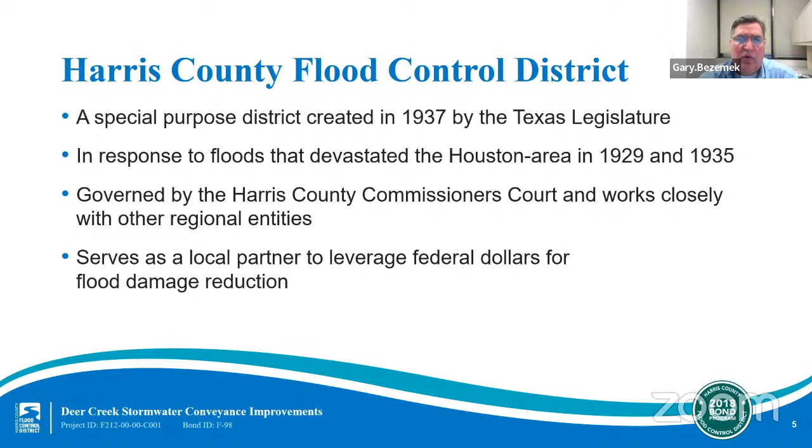The organization was created in part to serve as a local partner to leverage federal funding for flood damage reduction projects. Our mission has expanded since our founding, leading to billions of dollars in federal, state, and locally funded infrastructure improvements in the ground.

The mission of the Harris County Flood Control District is to provide flood damage reduction projects that work with appropriate regard for community and natural values. One of the most difficult challenges we face is constructing effective projects that are sensitive to community and natural values in a highly urbanized area.

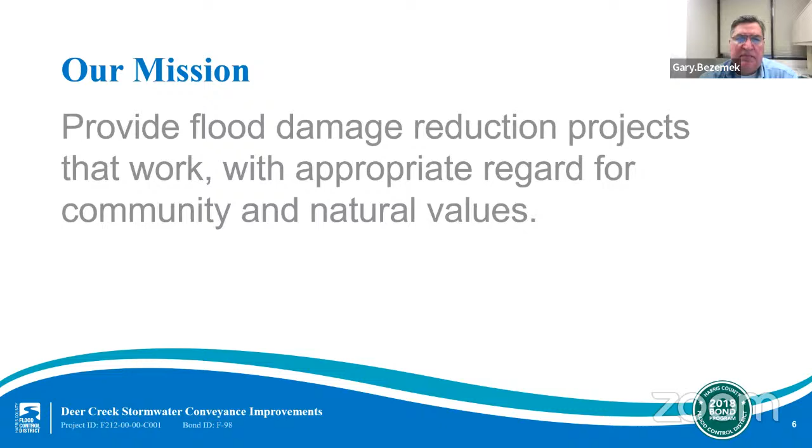Harris County includes 23 main watersheds, totaling approximately 1,800 square miles and more than 2,500 linear miles of channel. 2,500 miles is approximately the distance from New York to California. A watershed is a geographical region of land that drains to a common channel or outlet. Each watershed has its own unique characteristics and needs. The project we are presenting tonight is in the Galveston Bay Watershed, which is located in southeast Harris County.

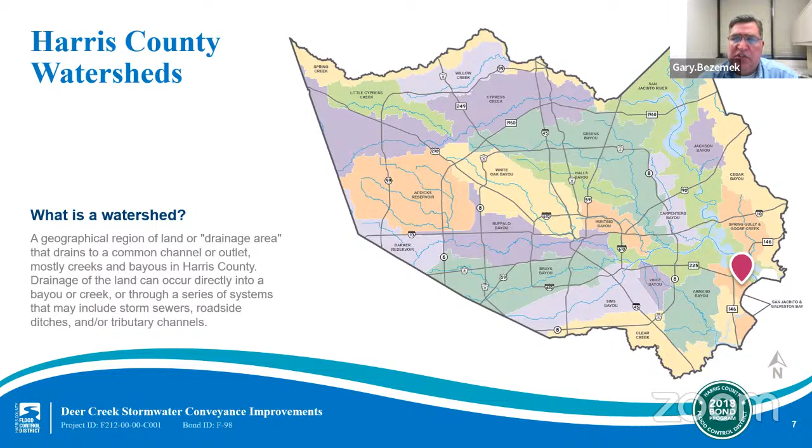Our area is flood prone. Here are some of the reasons why. Our area experiences extreme rainfall, including tropical storms and hurricanes. Our area is characterized by flat, slow draining land, and our area soils are clay soils that do not soak up excess rainfall quickly.

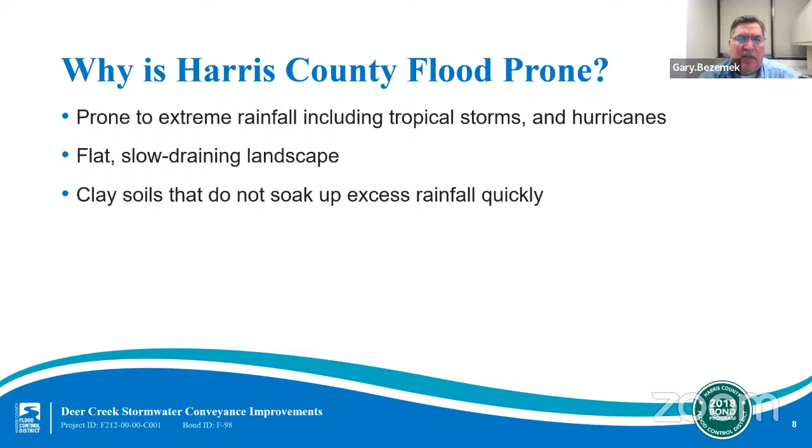While the Flood Control District plays a critical role in flood risk reduction, we are one of several entities involved in these efforts in our region. When rain falls on your roof, it flows through several jurisdictions, such as streets and drains, managed by the Harris County Engineering Department, a municipal utility district, or a city, such as the City of Houston, before it flows into a larger channel, creek, or bayou that the Flood Control District owns and maintains. This slide illustrates the various jurisdictions, which sometimes we even share with other entities.

Inside neighborhoods, as shown on the left side of this illustration, storm sewers and roadside ditches collect stormwater runoff and start the process of moving it away from streets and homes. Storm sewers and roadside ditches are the responsibility of the underlying municipality and Harris County for unincorporated areas. The larger bayous and channels that take the collected stormwater and move it through our drainage system to Galveston Bay are the responsibility of the Flood Control District. This is shown on the right side of the illustration.

In the middle is a stormwater detention basin, sometimes constructed by the Flood Control District. When storm sewers on the left are increased, this creates an increase in runoff. Since it is our policy to avoid any adverse impacts from our projects, detention basins help to safely take in and temporarily store excess stormwater during heavy rain events. Often we partner with Harris County precincts, utility districts, and others to add recreational amenities such as trails to these basins and along our channels.

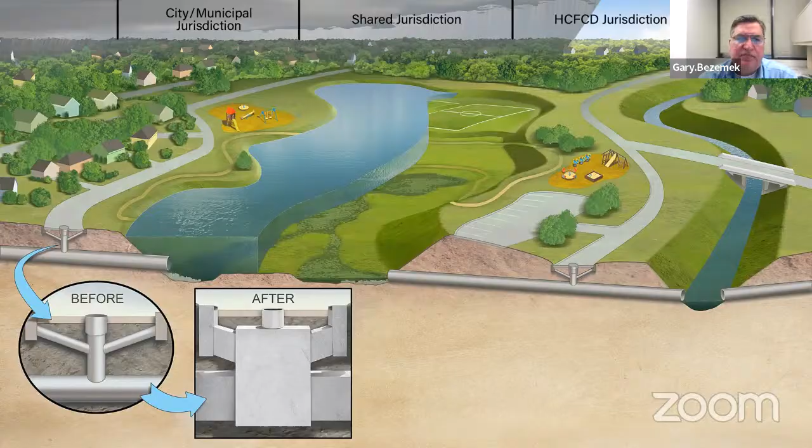On August 25th, 2018, Harris County voters approved $2.5 billion in bonds for flood risk reduction projects. This vote followed a series of meetings across Harris County in each watershed, which resulted in a list of what is now 181 bond projects. As of August 25th, 2021, every project included in the 2018 bond program has been initiated, including all 5 of the projects in the Galveston Bay Watershed.

A total of more than $1.35 billion in partnership funding has been secured so far to stretch the 2018 bond program even further. The actual timing of each individual project will depend on a variety of factors, including environmental permitting, right-of-way acquisition, if needed, and potential utility relocation, and in some cases, requirements of a particular grant. That said, project lists and projected schedules are updated regularly on our website.

While the bond was for $2.5 billion, the full cost of every project in the bond table is almost $5 billion. So we made it clear from the outset that we would need funding partners to fully construct the projects in the bond program. As I mentioned, we've had some success so far, having secured more than $1.35 billion in partner funds. And this graphic illustrates the many sources of those partnerships, including federal, state, and local funding that Flood Control District is working to secure for Harris County.

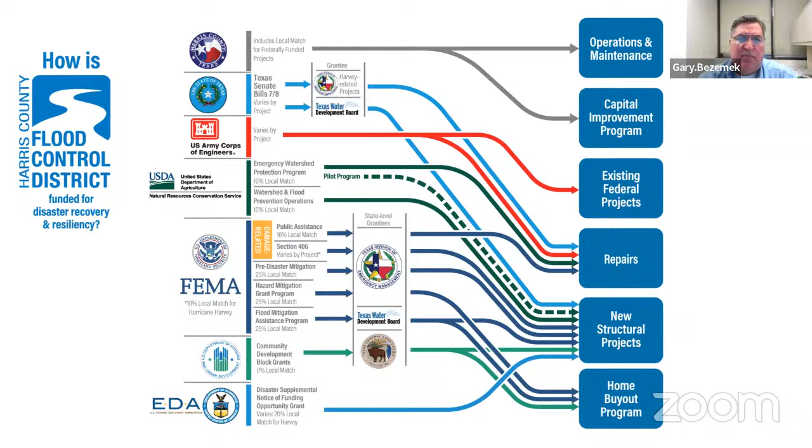Each agency has its own definition of eligible projects and its own requirements for local match funding. So the Flood Control District works diligently to match projects to the right partnership opportunities. We will now move into the part of the program that is specifically about the Galveston Bay Watershed and the Deer Creek Stormwater Conveyance Improvements Project.

There are about 24 miles of open streams within the Galveston Bay Watershed, including the primary streams, Little Cedar Bayou and Pine Gully, and other tributary channels, all of which drain into Galveston Bay. The watershed primarily drains the area that includes portions of the cities of LaPorte, Morgan's Point, Seabrook, and Pasadena.

The watershed has been subject to frequent and significant flooding, most notably Tropical Storm Allison, Tropical Storm Erin, Hurricane Ike, and Hurricane Harvey. Hurricane Harvey impacted many homes within the Galveston Bay Watershed, with the Federal Emergency Management Agency reporting 291 filed claims from the 40-plus inch rainfall within the watershed. Despite the significant damage done, Hurricane Harvey was not the storm of record in this watershed.

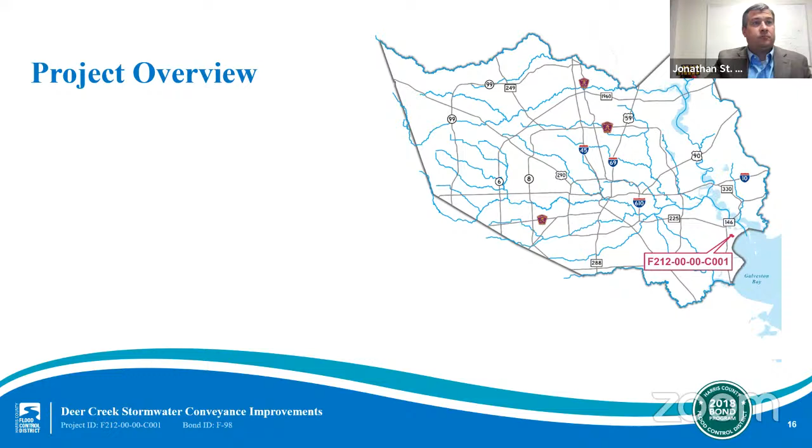Thank you, Jonathan. Another question can go for Gary or Jonathan. You can weigh in if you'd like. Are there other projects planned for Deer Creek improvements? I'm going to pass over to Jonathan, but from our study, this is the project that was recommended. It's the only project that I personally am aware of for this particular channel. Yep, Gary, that's right. This is the only project that we have going on for this particular channel. But I think as we laid out here, it's a pretty good project that takes this entire channel corridor, what we call the 100-year water surface elevation, all within banks or within the box culverts, and removes a good number of structures from the floodplain. And so, yep, it's the only one in Deer Creek, but it is going to be a good project.

And Jonathan, was the city of LaPorte involved in this project? The city of LaPorte is not involved in this one directly. So this project is in the Flood Control's 2018 bond program. And in that bond program, it's listed as ID F-98. The funding was solely on the list for the Flood Control District, and so it's not listed as a partnership project. However, the city of LaPorte is involved through coordination. We've had several coordination meetings with the folks over there because we're going down city streets and have to talk through the utility tie-ins and utility conflicts and other things. So the city of LaPorte is not directly or financially involved, but they're definitely indirectly involved and aware of the project. Thank you, Jonathan.

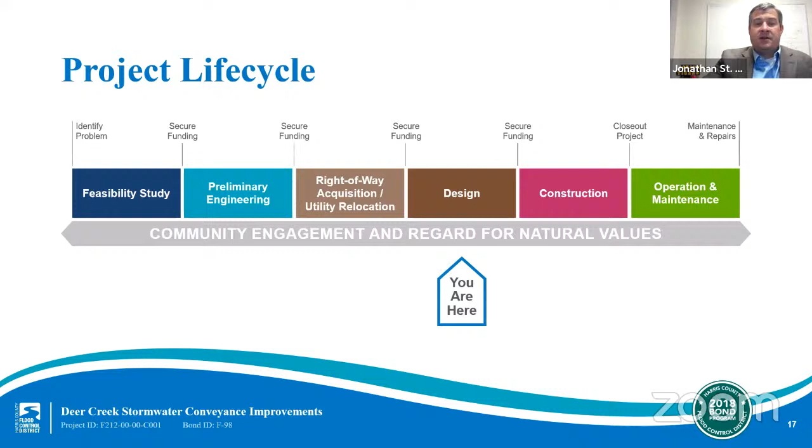And one of the biggest things that we're doing in this design stage is looking at potential utility conflicts. We're in the middle of a city, and so there's streets and cross streets and storm sewer inlets and any other utility that you can think of crisscrossing the area. And so we've got to do all of those investigations to make sure there are no conflicts. And if there are conflicts, we've got to figure out the best way to handle that situation in design. So I hope that answers the question. It did. Thank you, Jonathan.

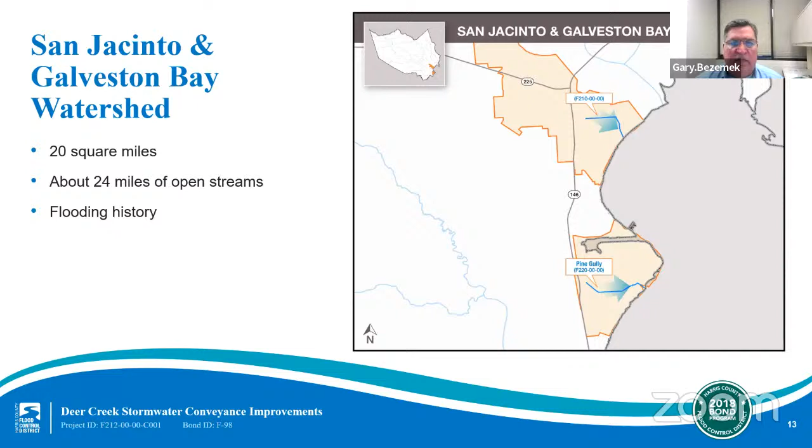And in that study, we basically studied the entirety of those highlighted areas on this graphic to determine where there's been historical flooding. In the case of Galveston Bay, there were already some projects on the books that were moving. So if there was already a project associated to a channel, we didn't focus on those channels with our feasibility study because those other projects were already moving, already had funding. So the area that scored the highest is this project highlighted right here, the F212, the Deer Creek channel.

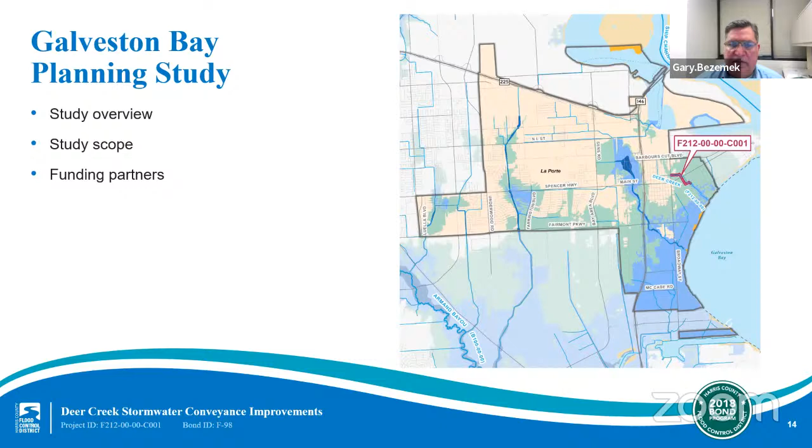What the project basically is, is an increase of the existing channel out there. It's an increase of the open channel, and in segments of it, it goes underground, so there's an enclosed system. But what we ended up finding was that this area here is restricted, and because the topography is so flat, when you get larger rain events, the water cannot get through this section that's highlighted in purple, and water will just spread out and sheet flow to the area, create street flooding. There will be home flooding, and the water actually will overflow and go over to the west and go into the 216 channel.

So as we were identifying this as a potential project, we were looking at, okay, this area has lower capacity. And so we started looking at alternatives to say, what would it take to get the water out? Typically, because we have a no impact requirement, we typically would see a detention basin at the downstream end where we're doing improvements. But as we did the study, we found that the lower end of F212 actually has enough capacity that if we can get the water to it, that water can safely drain all the way to the bay without adversely impacting any of the residents, streets, any of the infrastructure down there. So this basically turned into our project from the feasibility side. We identified improvements for what you can see in the highlighted area for 212.

And we talked about the process. I work on the feasibility side. So sort of our job is at a high level to figure out where the next project would be and what that project would look like. And then once we get to a far enough point that we've identified that, then we hand it off to Jonathan's side where it goes into the design.

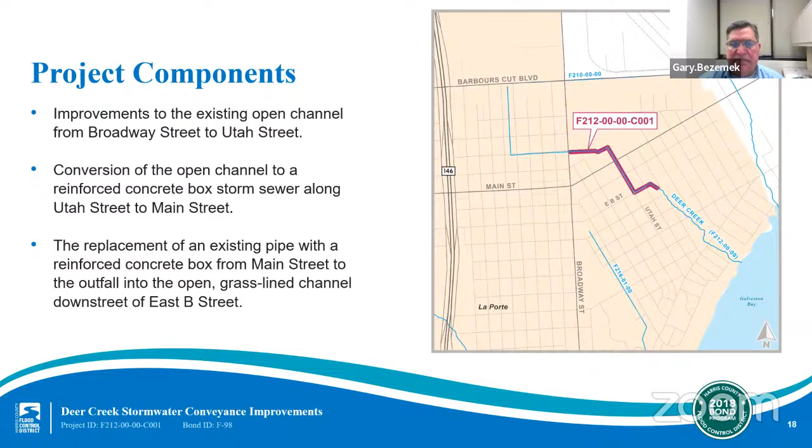Good deal. Thank you, Gary. We'll take another question from Robin Cunningham. She's asking, have there been any studies of the erosion impacts to the coastline properties?

Well, I'll take a quick stab. The feasibility studies that we conducted were strictly looking at the internal infrastructure for the open channel network or enclosed channels within the Galveston Bay Watershed. So the feasibility study that we worked on did not look at coastal erosion anywhere in that study. We did address or look at erosion if it was occurring within the channel system that we looked at, but nothing that we did as flood control was looking at erosion impacts along coastline properties.

Thank you, Gary. Jonathan, will there be future meetings for the other projects in this watershed you mentioned earlier? Yes, there will be, and I mentioned several of those other projects, and I will probably mess them up if I try to tell you the exact meeting date, and I'll probably mix them up. So I will just tell you to refer to our website, and our communications folks do a really good job of keeping those websites up to date.

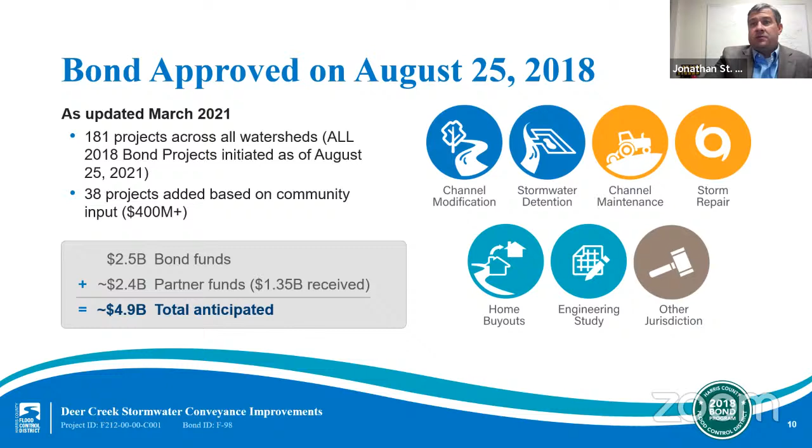Good deal. Thank you, Jonathan. Gary, will any of the other watershed study projects be implemented? Yes, the watershed study, there were 2 recommended projects that came out of that. And the reason there were 2 is, when we went into the feasibility study, we were given from the bond the $4 million that Jonathan mentioned.

So basically our target for trying to find projects in the watershed was, let's study everywhere that we've seen flooding problems. Let's identify what could be done. But we were trying to come up with projects that we could use this money towards. So the two projects that were recommended both scored very high.

And they were both kind of, when combined, in that $4 million range. So as the project goes from feasibility to construction, every time we relook at it, we do adjustments to the overall project costs. We pull new information, we learn more about pipelines and other utilities. And so the project estimates that we do in the feasibility side get refined.

And so it was our recommendation that the two projects that we talked about, the Deer Creek as well as the F220, both move forward. In order to make sure that we had enough funding, though, and because the Deer Creek project had more information in it than the other project, we've moved this project to go straight into design. And so it's pushing forward. So as we get further into it and we have better cost estimates, that'll tell us how quickly we'll be able to move to the other project.

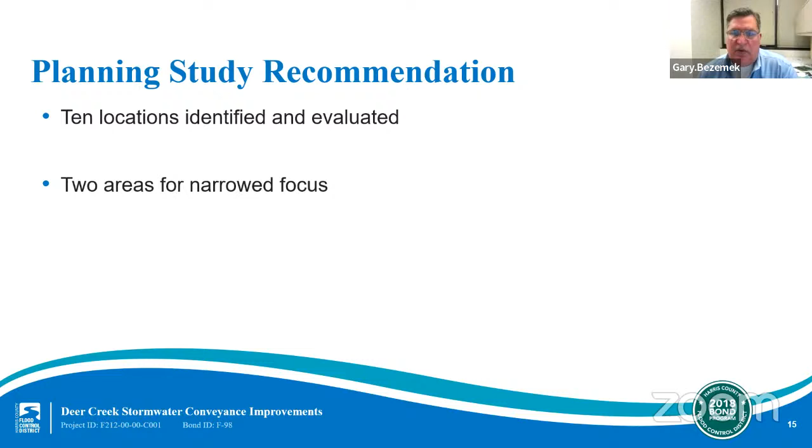So the question of, will this get constructed? I believe that the projects will. It's just a question of how quickly we can get to it. And that's all a question of availability of funding.

Thank you, Gary. Stephanie, who's responsible for cleaning the streets during construction? How does that work? So the construction contractor will have that in his contract. He will be responsible for keeping dirt from impacting any nearby roads, as well as preventing impacts to the stormwater quality. If there are issues, and sometimes we do see that, they can also be reported to our Flood Control District Service Request Center on the HCFCD website.

And Stephanie, when was construction supposed to start? So we are anticipating and working towards getting started early 2023. And then as long as it gets started on time, we are thinking about 1 year for project duration. Thank you, Stephanie.

All right. Gary, I think you touched on this a little bit in your presentation, but why are we using a box culvert in this project if it's more expensive? I'm sorry, were you directing that to me? Yes, Gary. Okay. Box culverts are typically more expensive than an open channel, but that's not always the case. If you just compare the box culvert to the open channel, typically it's going to be more expensive. But the box culvert can typically convey more water in a smaller cross-sectional area than an open channel, because our open channels, to follow our criteria, have a certain side slope. And as you have a deeper channel, the top width gets bigger and bigger.

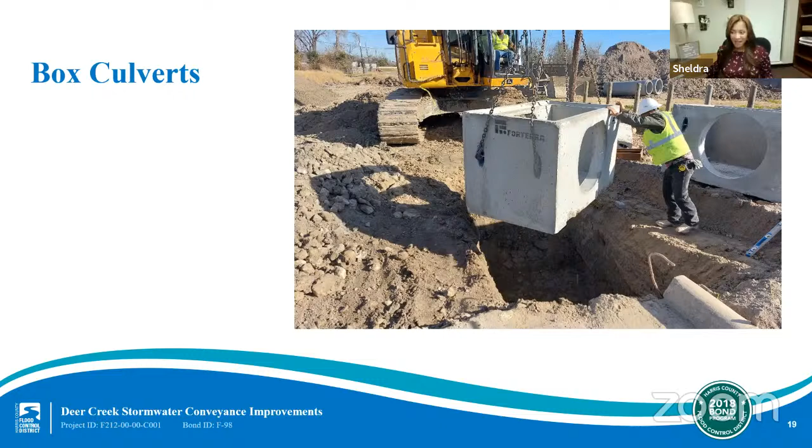And with that, I'd like to share one final reminder that we are continuing to accept comments and feedback on this project through March 31st. Thanks to Gary, Jonathan, and Stephanie for giving us such great answers tonight. We do also want to encourage everyone to get flood insurance as flood season in Harris County runs year round.